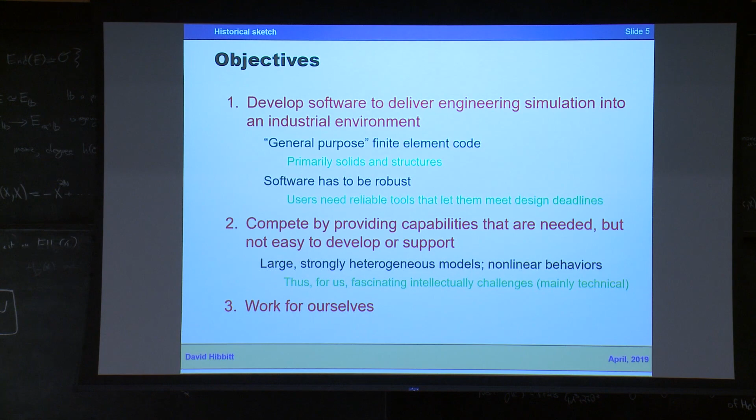They've got to get a design qualified within a certain amount of time, so the software has to be robust. They must have reliable tools. We wanted to compete by providing capabilities that are needed but aren't easy to develop or support, so large heterogeneous models, nonlinear behaviors, and so on.

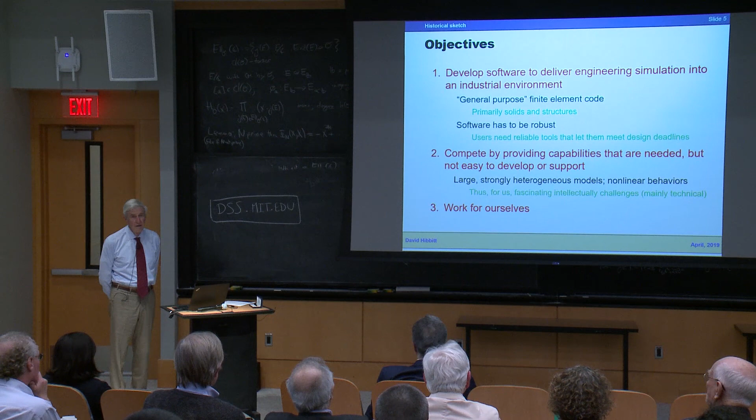For us, the motivation was primarily the intellectual challenge of trying to pull this off and make it work. And thirdly, we wanted to work for ourselves. We wanted to make our own decisions about what we were doing.

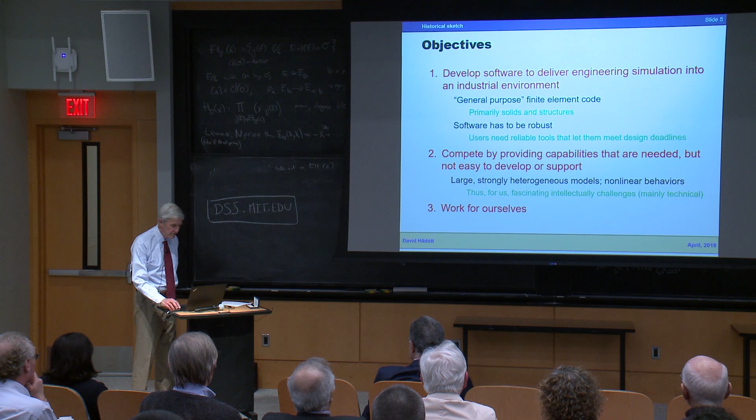Secondly, we wanted to focus on organizations with demanding requirements so we could basically win by delivering value, delivering something they wanted to use in their engineering operations and they were willing to pay for because they couldn't get it many other places. So we didn't want to compete based on price. We wanted to compete based on functionality.

But we also always wanted to keep in mind who our customer really is. It's very nice to be able to say, oh, well, Boeing or Toyota or what have you use our software. But in the end, we always said the customer is not the company. The customer is somebody like us. It's an engineer or an engineering manager who's made the decision to use our software to get his or her job done, and we better not let that person down. So our customer is always the individual who needs to have this software as a tool that he or she can use to get their job done.

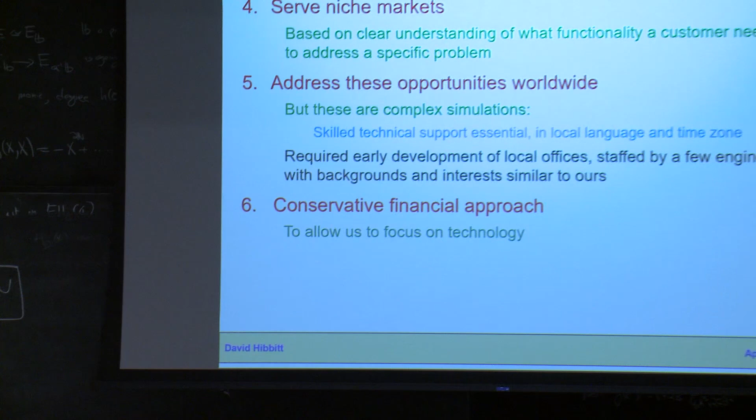We wanted to go into niche markets based on understanding what functionality a customer really needs and then address their problems. And we needed to address the opportunities worldwide, because we're going after niches. You've got to have enough business to have a viable business, and so you've got to go all over the world. But these are complex simulations, so you really have to provide skilled technical support.

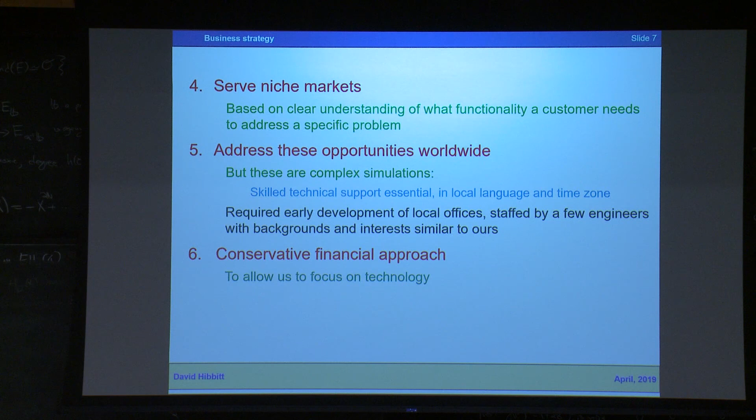That has to be in the local language at the local time zone. If you're in Japan or China and somebody gives you a hotline number in Rhode Island and somebody's speaking English, that isn't going to work very well. So we knew if we were successful, we'd put local offices in place all over the place, staffed by engineers like us who just wanted to help people use this software.

And finally, we wanted to be pretty conservative financially. We just didn't want to worry too much about business issues. We wanted to keep our focus on the technical issues.

The product strategy was the usual engineer's approach: design, then build. Design what you're trying to do, then build it. So our design, in those days, was really three manuals. It began with a user's manual. Bear in mind, these are the days when there was no computer graphics or screens to input stuff and so on, so people put in lines of input and got out lines of output. We wrote a user's manual to put user convenience and ease of use first, to make it easy for people to use the software.

We then designed the software architecture, documented in a systems manual, and we saw the software primarily as a data management system with some engineering routines that were basically accessing that data, working on it, and putting it back into the database. So the core of the software was primarily data management, but there's engineering functionality that talks to those data. We wanted a very general architecture that would give us the broadest anticipated functionality, and we also designed modular code. The idea being that, of course, we wouldn't get it right the first time, but we wanted to make sure that what we got wrong, we could replace a module rather than redoing the whole thing. And of course, we had to have a theory manual.

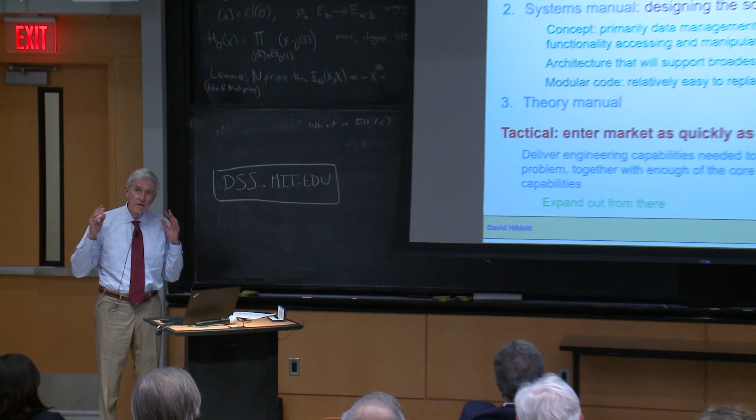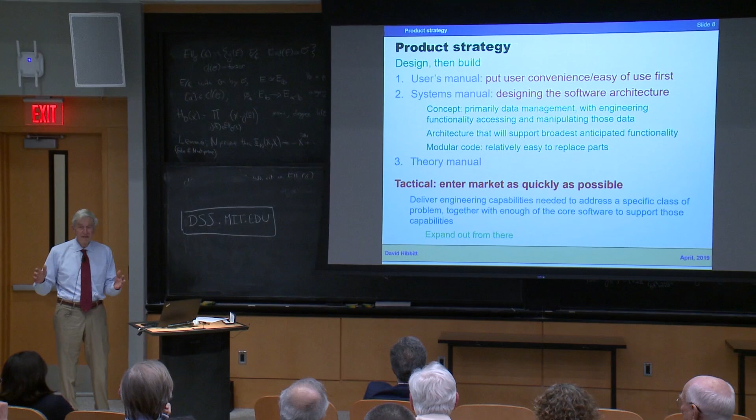somebody will pay us to deliver that functionality, deliver that engineering functionality, and then for this core software, all the backbone of the software, we'll develop just enough of that to support that engineering functionality. So essentially more or less a single-use code, but then work out from there, expand out from there. So that was the concept, and now here's where it happened.

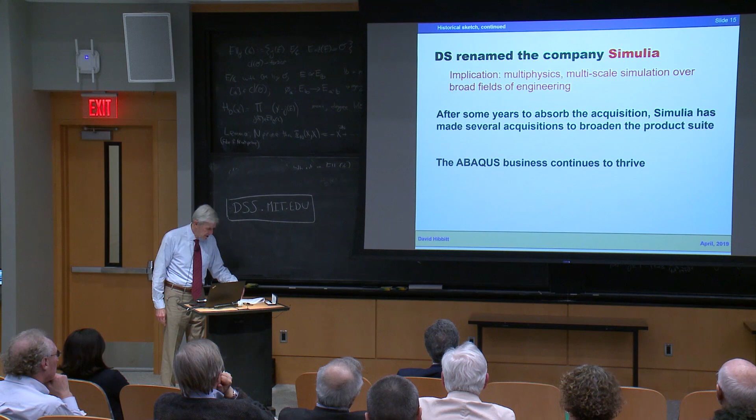And by now, the last check I made, there are about 1,400 employees in the company worldwide. The headquarters is a rather nice building in a sort of a nice office park that's fairly close to Providence. It's in a town called Johnston near Providence. And it's only 10 miles from that farmhouse where we started. So the company hasn't moved very far, but it's certainly come a long way in terms of the number of people it has and just how the technology has developed. So that's the history. Now I'm going to just turn to the technology.

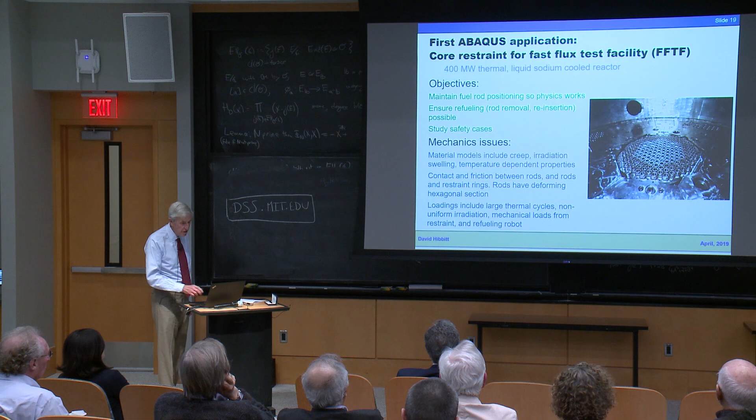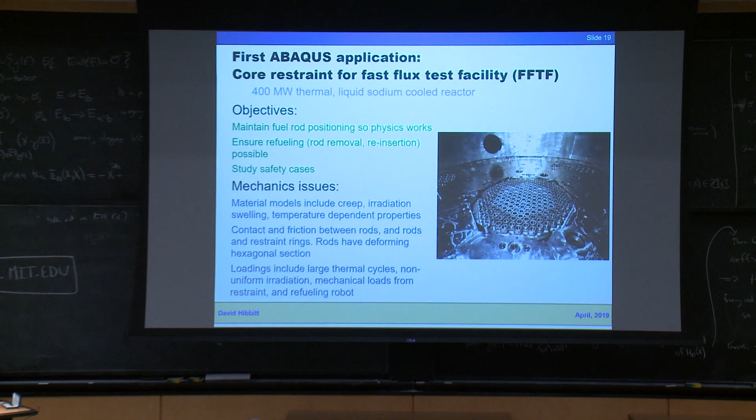And I'm going to start by showing you just some examples of applications. And the first one is here, and this was actually the first application we did with Abaqus. It's core restraint for a fast flux test facility. This is a liquid sodium cooled reactor, very high temperature nuclear reactor. And I can describe the problem very easily. You can see this is the core of the reactor. These circular things are actually hexagonal external section tubes.

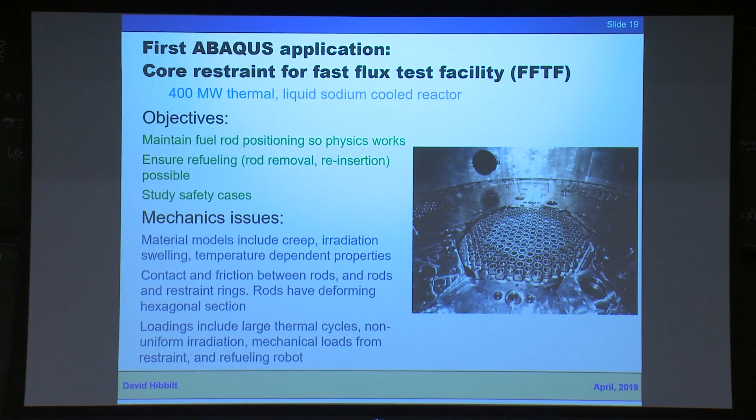They're like a beam. The fuel pellets are inside them, and they're held together inside these restraining rings on the outside. And the mechanical problem is simply to hold those rods together so the physics will work, so you can refuel the reactor when you have to, and so it'll stand up to the safety cases if there's an earthquake or something like that.

Mechanics issues are as shown here. There's creep going on because there's such a high temperature. There's radiation swelling, temperature-dependent properties. There's contact and friction between the rods and the restraining rings. And they have a deforming hex section. And the tolerances are very tight, so we had to use Lagrange multipliers to impose the contact conditions to get the accuracy. And of course, the loadings, as you might expect, are large thermal cycles, non-uniform irradiation, and so on.

So this is the first application, and delivering this actually saved us. I learned about this problem in June of our first year. We delivered the software at the end of September, and it worked in the sense that it did the test case. Didn't do anything else, but it did. We got paid, and we got a follow-on contract, so we were off.

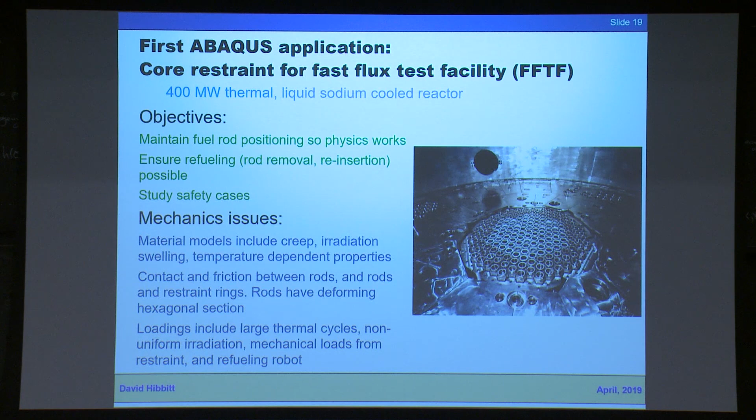I next will show the second Abaqus application, and this is to do with offshore oil fields, and this is just a little picture, if you like, showing offshore oil installations. You have surface equipment on platforms, some of it's floating. You have risers that go from there to the seabed. Remember that the water can be hundreds of feet deep, so these are pretty flexible pipes going down. And on the seabed, you've got wellheads, you've got manifolds, and you've got a bunch of pipes around on the seabed to join these together.

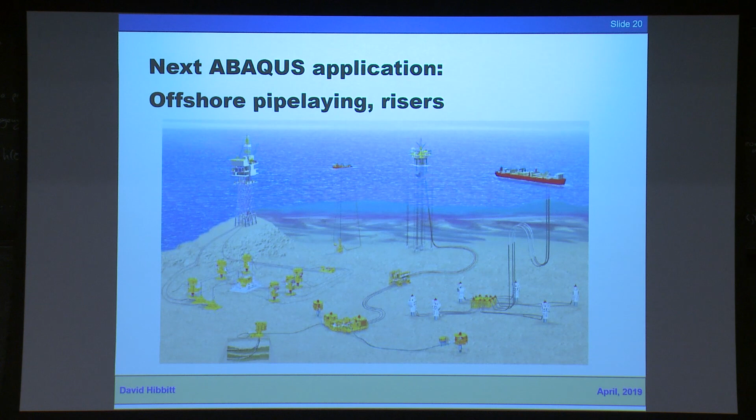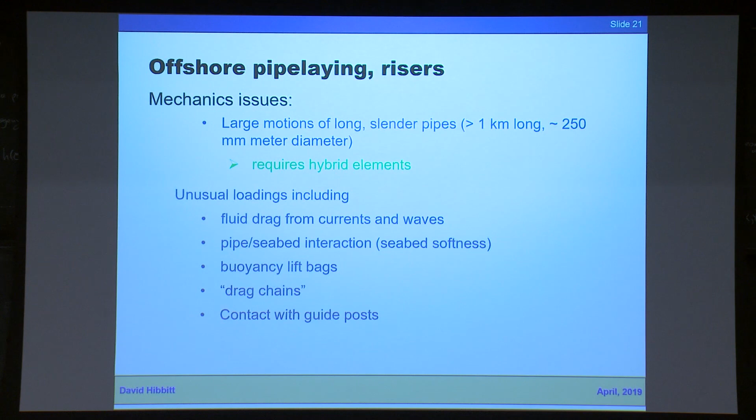And the basic problem is installing those pipes. And that doesn't sound like a really difficult problem, but what makes it difficult are these are very long, slender pipes. They're typically a kilometer or more long. They're only maybe a foot diameter, a hollow section steel pipe. The problem you have is if you get these in the water and you get them on the seabed, you've not got them down where you want them, because you're putting them down from the surface, from a ship. You can only control it through cables from the ship. You get it laid down someplace, but that's not where the wellhead is or the manifold.

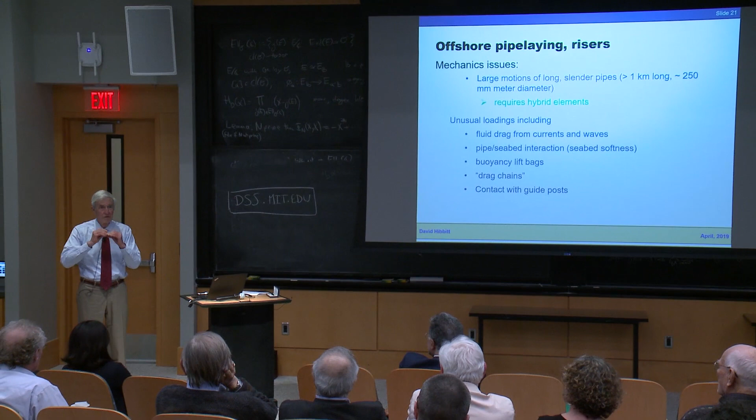So you've got to pull it around on the seabed. And it's like a big drinking straw. If you bend it too far, the cross-section buckles, you no longer have a pipe, you've got some expensive steel on the seabed. So you've got to be able to move it around. So you've got large motions of these long, slender pipes. You can't do it with a stiffness method. You have to use a hybrid method.

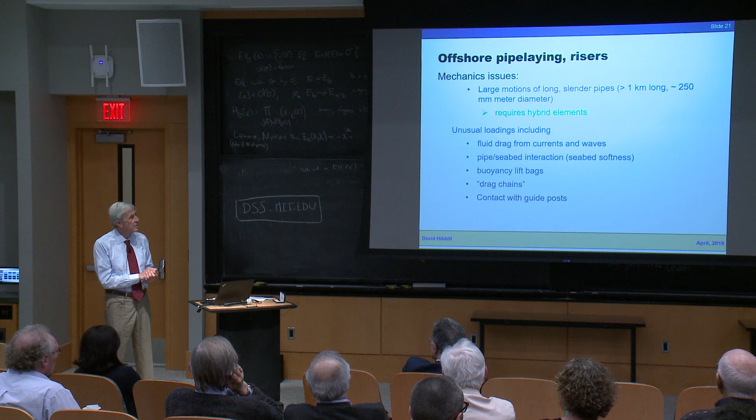And there's some unusual loadings. You're in a fairly dense fluid, and there are currents, so you've got drag on the pipe. The seabed is often soft, so it's moving on the seabed. You've got to model that. They often use the combination of buoyancy, lift bags, and drag chains. They'll get it a couple of meters off the seabed with a lift bag. Underneath is a drag chain. It's obvious what a drag chain is. So you've got to model that as a boundary condition. And they sometimes put guideposts in the seabed to guide it.

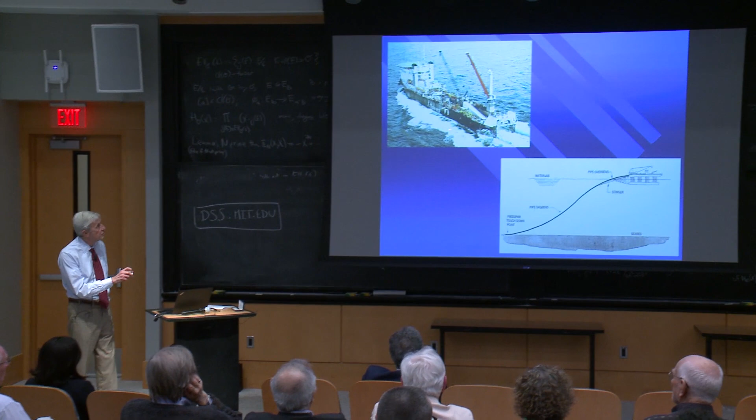I'm just going to show you an example from a customer. I'll flip through these slides pretty quickly that shows a pretty simple case of this. The first thing is actually to get the pipe on the seabed. What you do is you launch it off what's called a stinger on the back of the lay vessel. It goes down onto the seabed. Since this is hundreds of feet, this is a foot in diameter, you can easily lose the pipe doing this. You've got to get enough tension on it to avoid losing the pipe doing that.

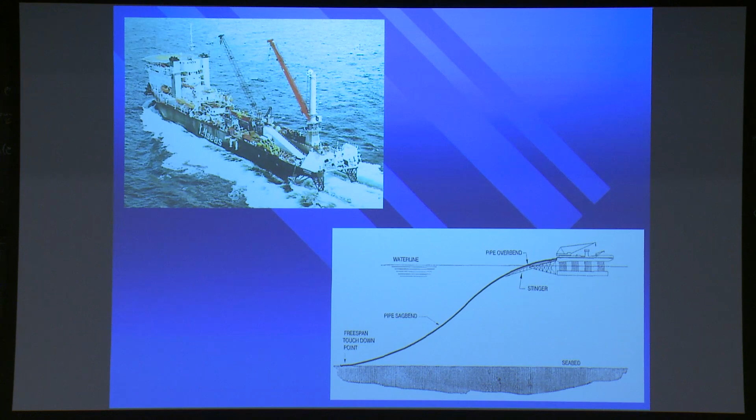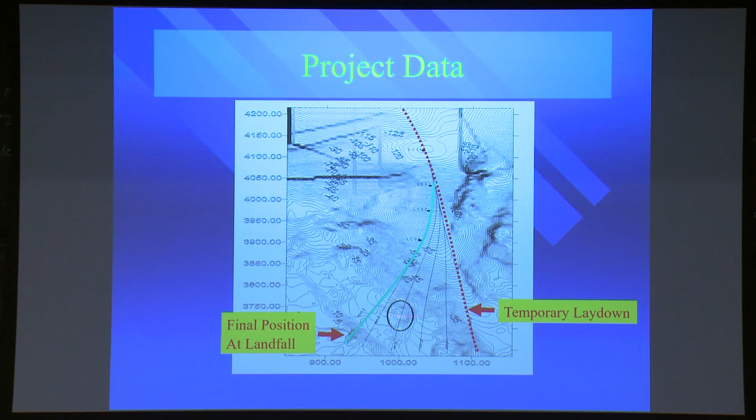If you get it on the seabed, then in this case, you can see the seabed isn't flat. These are the contour lines on the seabed. They laid the pipe down along this red line here. They want to pull it around to get it up. This is actually coming up on shore here. This steep part of the seabed is actually coming up on shore. So that's the problem. Your pipe's been laid here. You want to move it over here. And your tool for doing that is this. It's a vessel from which you lower down some cables, attach them to the pipe, and drive your boat so you can move the pipe around.

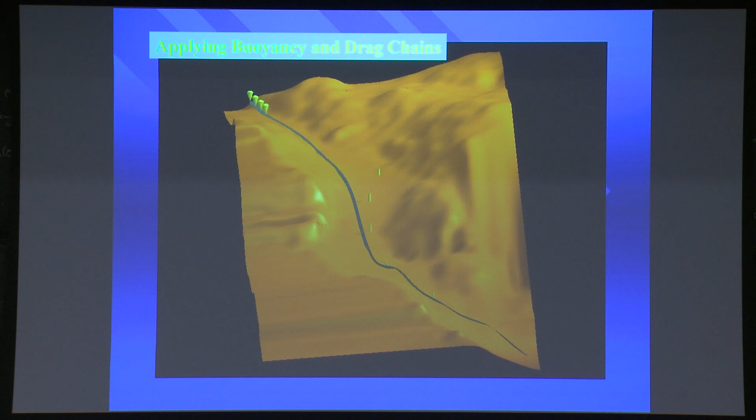And I'm just going to take you through a series of snapshots showing this. This is looking at this particular pipe. So here's where it was originally laid. This is where you want to pull it up on shore. So you're going to move this end around over this mountain and get it up here. And you can see they've got a few guideposts here to guide the pipe around. So I'll just flip through the scene. We put on the buoyancy bags and the drag chains. We apply the cables. We lift it up. Around we go. Lower it down. Take this stuff off. You're finished. So it's as simple as that. Unfortunately, in real life, it isn't at all that simple, and there's a lot goes wrong. But they get them laid, they get them done, and it's a pretty tricky, sort of fun kind of problem.

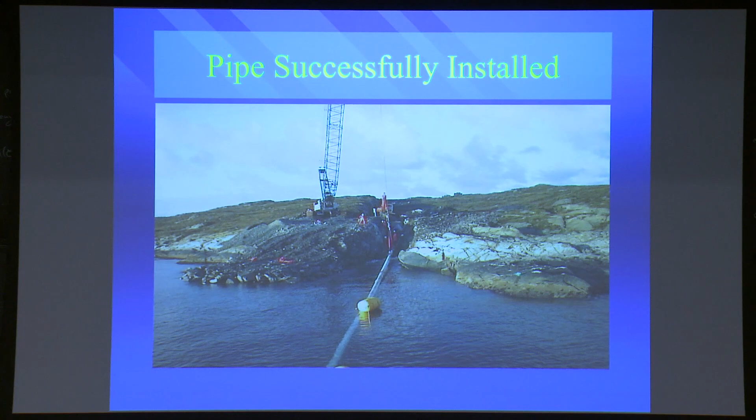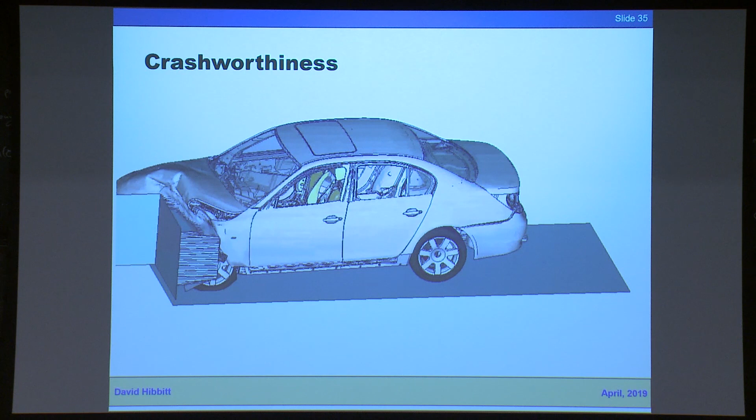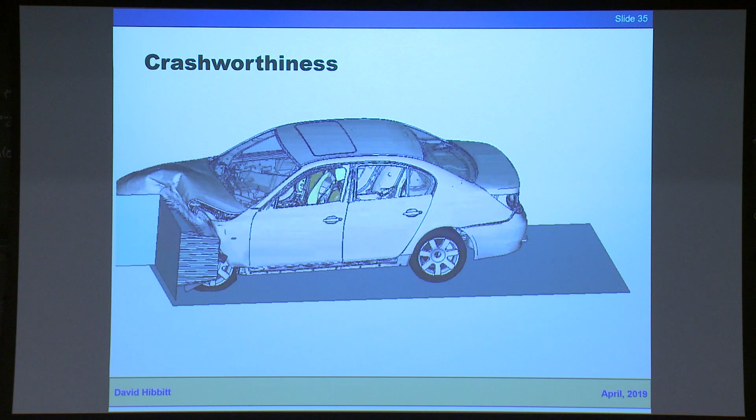You can see we've got metals, we've got plastics, we've got rubber, all undergoing pretty large deformations, buckling, crushing, and so on. We've got a lot of rigid bodies. We've got some glass in here. The engine, the gearbox, and so on are all rigid bodies, and they're having contact with some other rigid bodies. So it's a pretty complex problem, and lots of large-scale computing is needed to do this kind of a simulation. But it's far more valuable than a test when you're doing design. Remember, when you're designing a car for crashworthiness, you don't have any cars to crash because you've not built your tooling yet. So every one of these things you crash, you've hand-built that car to crash it. So very expensive prototype. Much better to do simulation, particularly because you can also see much more about what's going on.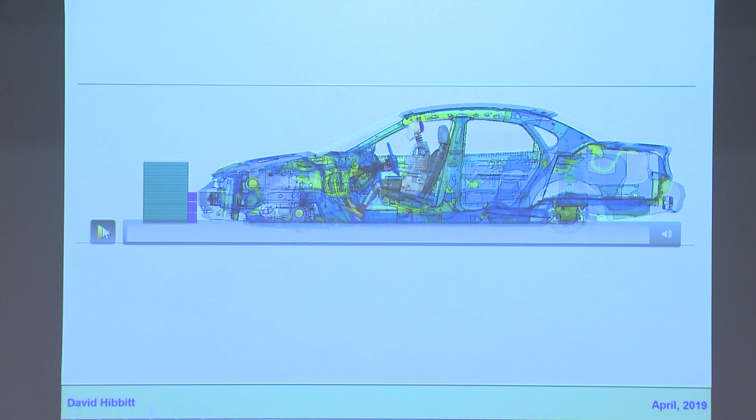Again, I'm now looking underneath one of these cars, and you can see we can take a look at what's really going on from the underneath, or with good visualization tools, what we've done here is we've made the side of the car transparent so we can look in and see what's going on while the car is crashing from the side. And you'll notice the design technique here is the powertrain goes down under the floor pan so it doesn't run into your knees and crush your thighs.

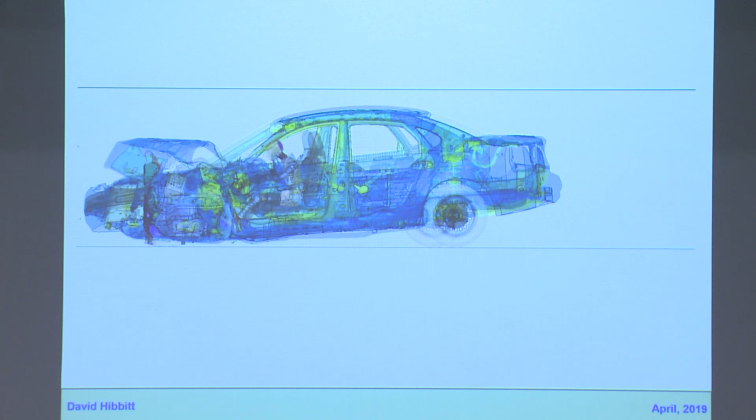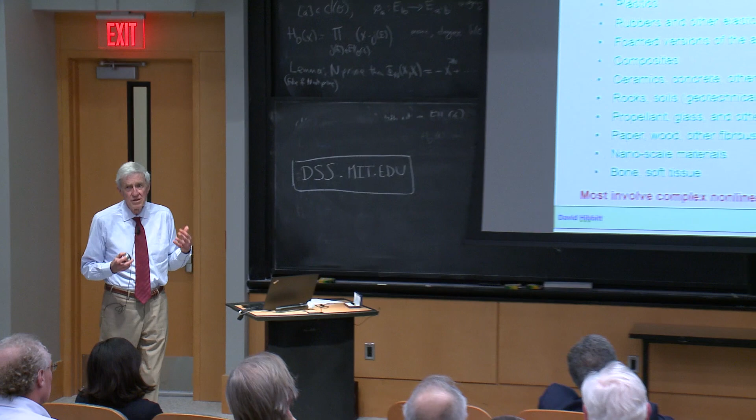Let me talk about some ingredients in the technology. And first of all, materials. Constitutive modeling is a huge part of it. I've listed a bunch of materials that we worked on from time to time. I'm not going to take you through that list, but it's a lot of constitutive modeling that you have to have. Many materials with complex responses to high loads. The models are often heterogeneous, lots of different materials.

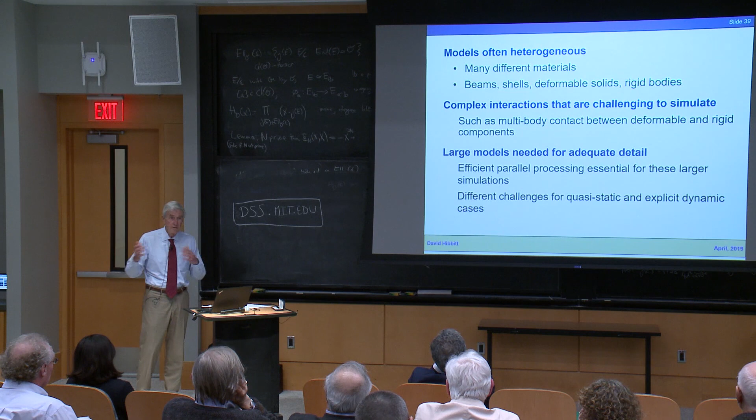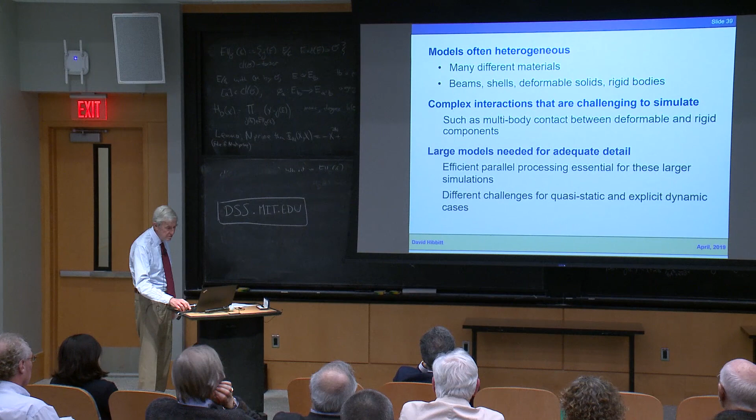Beams, shells, deformable or rigid bodies, so if you're thinking of it mathematically, the eigenspectrum of the stiffness matrix is pretty broad. There are complex interactions that are very challenging to simulate, multi-body contact, and there are large models. So those models I showed you, 15 million variables is not a small model, at least for me. And so you've got to make effective use of parallel processing, but that's quite hard when you've got these heterogeneous models. Keeping all the cores of a parallel processing machine busy with this kind of modeling isn't easy. And the challenges are very different for quasi-static and dynamic cases, such as I showed with the car crash.

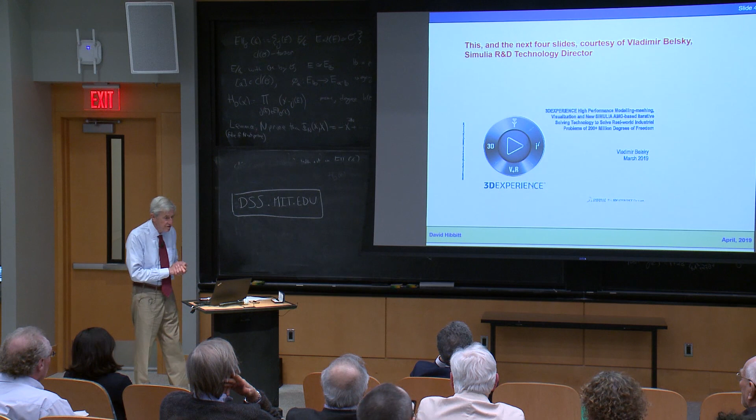I borrowed some slides from a colleague who happens to be sitting here, Vladimir Belsky. He works on solver technology. He directs that technology in Simulia now, and he's lent me a few of his slides. So if you want questions about these slides, Vladimir can talk to you after I shut up. But this is an AMG-based iterative solver, and I'm just going to show you a couple of cases.

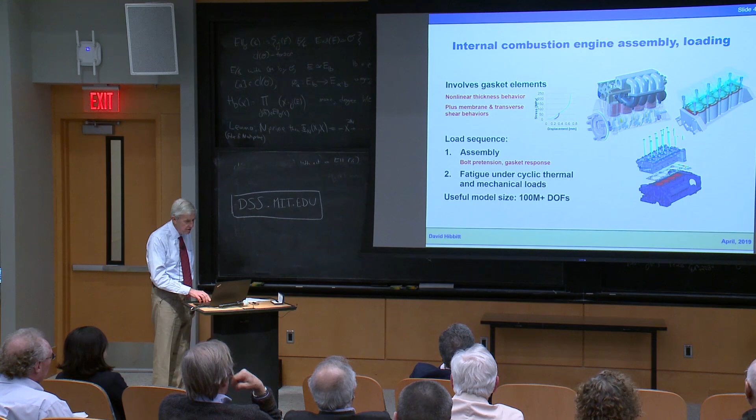This is internal combustion engines, and in this case, we're bolting the head of the engine onto the cylinder block of the engine. So the load sequence is to assemble. There's a gasket in here, and the gasket has a nonlinear behavior. And the whole idea is to make sure you can get the fatigue life you need out of this engine. So you've got to assemble the engine by tightening the bolts, squash the gasket, take it up to temperature, do the fatigue cycles, and see what goes on.

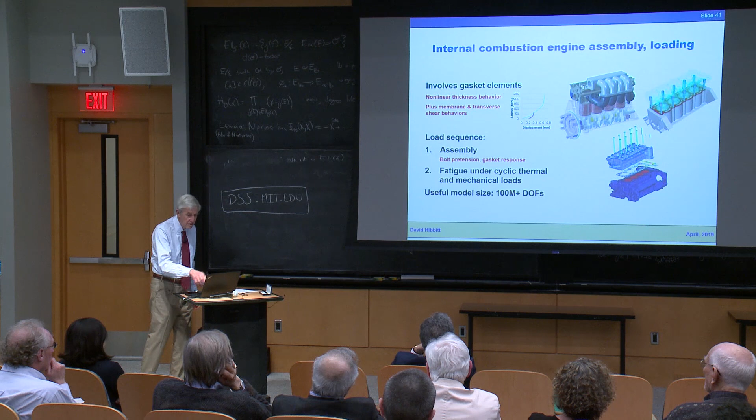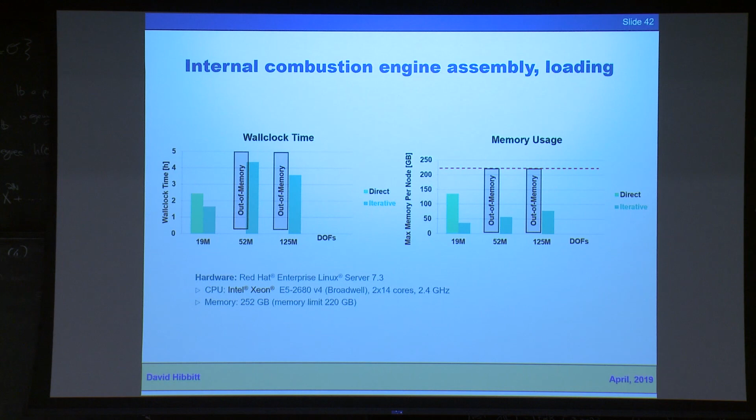And there's a lot of detail in these models, and I'm just showing you some results that Vladimir has with his solver. And you can see that we're doing this with about 125 million degrees of freedom. And I've got wall clock time over here. You can see they'll do that calculation in a few hours on this kind of a computer. So pretty effective use.

Another example here is a turbine blade. Again, this is heat transfer analysis. You may know that with these blades, typically the airflow over the blades is at a temperature that's above the melting temperature of the metal. So you deal with that by having lots of holes in the blade and blowing out cooling air. So you've got a film of cold air between the hot fluid and the metal. So what you're interested in doing basically is heat transfer analysis and then stress analysis just to get fatigue life out of these. And in this case, it's at a high enough temperature that there's creep going on.

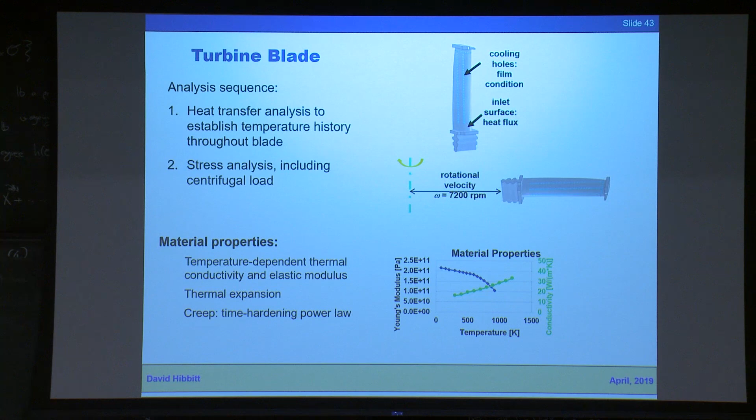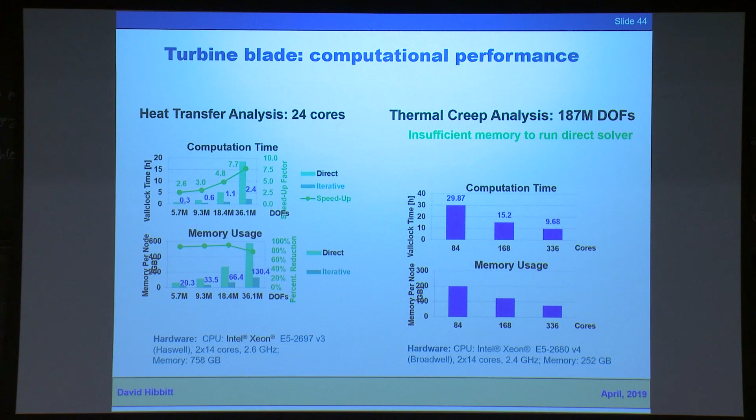Again, what I'm looking at here is the computational performance, and you can see here the heat transfer analysis. The thermal creep analysis is almost 200 million degrees of freedom. You couldn't do this with a direct solver. What I think is impressive is the scaling he's getting on the number of cores on the machine to get this down to a good compute time. So that's the kind of computation you have to do for that class of calculation. And the solver technology you need to do that is pretty sophisticated.

But this is an issue, of course, because now we're putting out vast volumes of data from the analysis code, but in the end, the user, the customer, has to make an engineering decision. Is the design acceptable? And if not, how am I going to improve it? So you've got to reduce all of those data to that engineering decision.

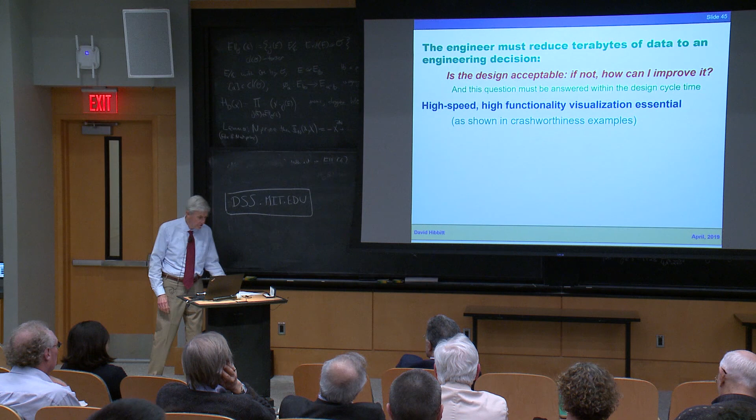So high speed, high functionality visualization is absolutely essential, and bear in mind this is spread over a parallel processing machine. So you've got to be able to do that kind of stuff as well. But how do we know the simulation really is close to reality?

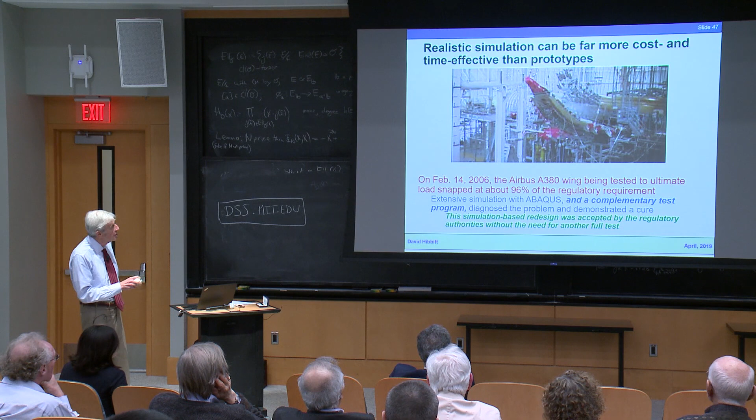Well, first of all, I want to make the point that it can be far more cost and time effective than building prototypes. What I'm showing you here is an ultimate load wing test on an airplane. This is an Airbus A380, the double-decker airplane. All commercial aircraft have to do an ultimate load wing test. What they're doing here is they built the airplane, they bend up the wing and load it until it breaks.

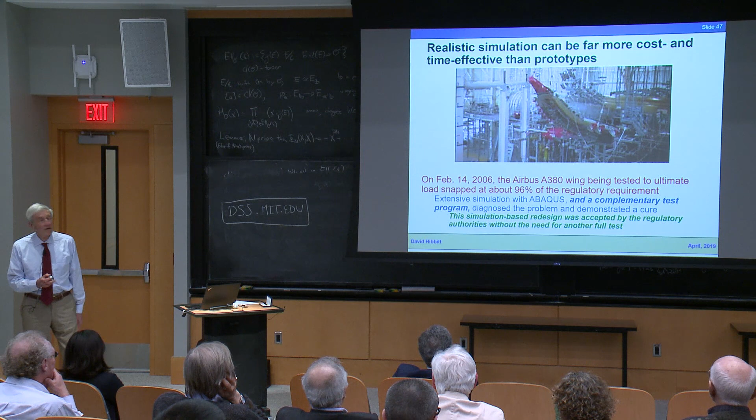Now, I think if you were riding this airplane, you might get a little nervous if the wing were bent up this far. But that's the test they do. And there's a regulatory requirement. This plane failed. They tested it. It got to 96% of the requirement. It didn't pass its test. It was fairly easy to diagnose the problem.

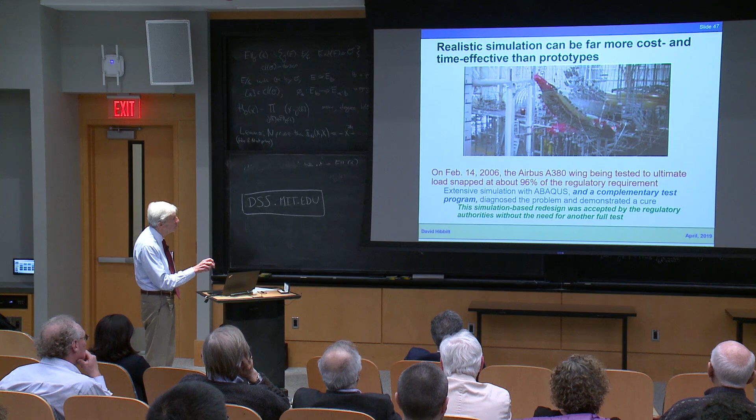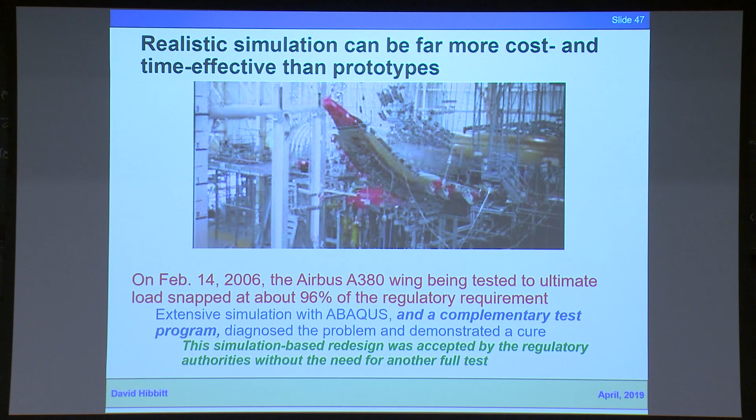What happens is these wings are complicated structures. Down in this part of the wing, there's a lot of interior structure with walls in it, and those walls are helping. And they didn't expect those walls to buckle, but they did. So they just had a buckling problem. They hadn't modeled that. What they did is did lots of simulation with Abaqus. They redesigned this part of the wing.

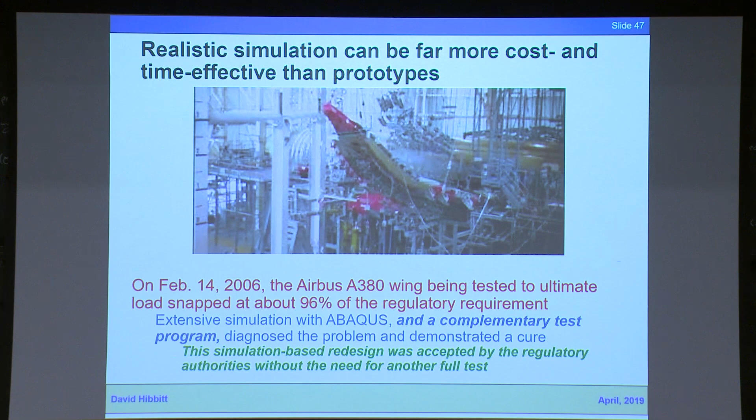They did a test program on that part of the wing, showed Abaqus predicted the failure in the original wing, showed the redesigned wing passed the test. So as far as I know, this is the only commercial aircraft flying that never passed its wing test. But I'd be quite happy to ride in that airplane. That wouldn't worry me.

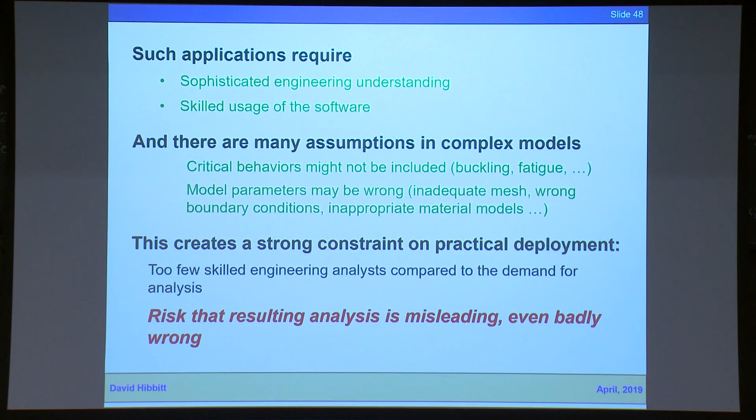But there is an issue here because this requires pretty sophisticated engineering understanding, skilled usage of the software, and there are lots of assumptions in these models. You just might not have got it right. So there's a huge constraint on practical deployment. There are just simply too few skilled engineering analysts who understand what they're trying to do, understand the software that they're using, and the modeling they're using to make sure that they're getting it right. And so there's a real risk that the analysis is wrong and could be even badly wrong.

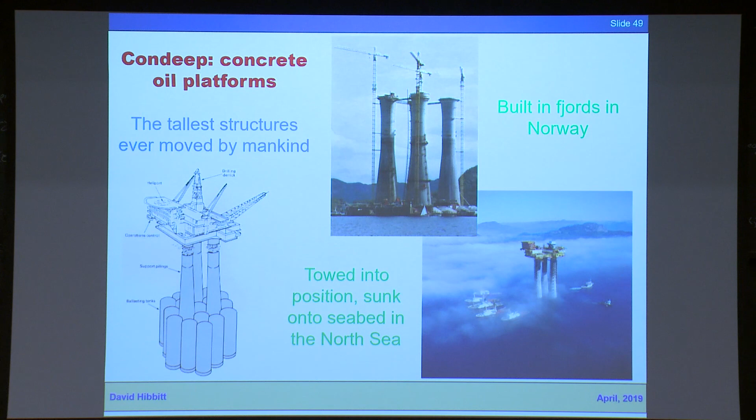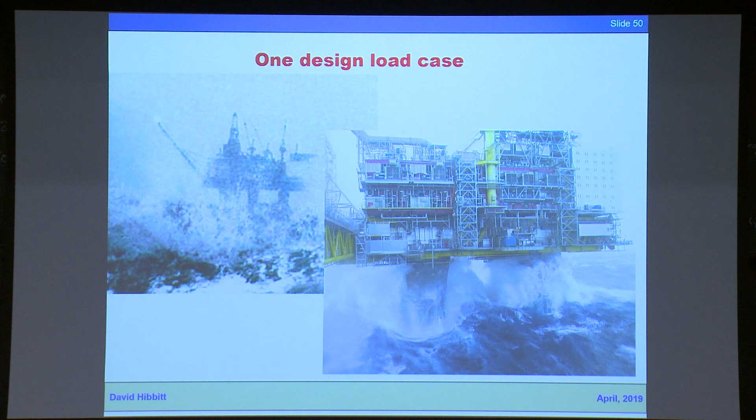August 1991, the Sleipner A Condeep cracked and sank during a test. It was in the fjord. They'd sunk it down, and they pumped one of those tall pieces dry, and the guys working up top heard this big bang. They heard water pouring in. They got off the platform. A short while later, there was a seismic event locally, and there was a bunch of concrete on the seabed.

The loss was about $700 million in 1991 dollars, 1.3 billion today. And it was bad finite element mesh. In these joints where these cylinders join onto each other, you can see a test specimen here. They just didn't have enough rebar in there. They didn't have enough reinforcement. And the finite element mesh was too crude to pick that up. So there's a huge loss just because the people weren't doing the simulation accurately enough.

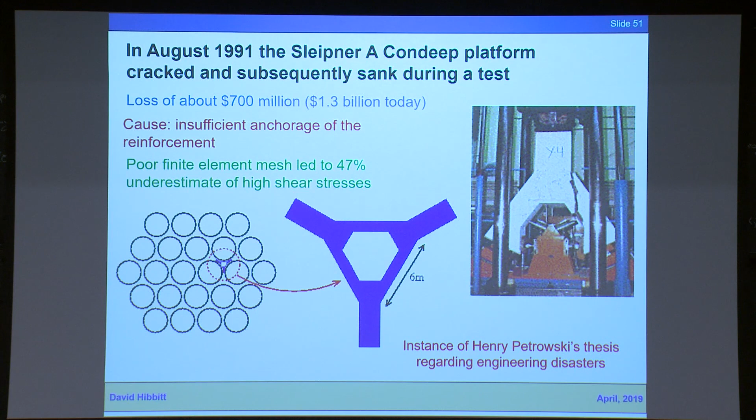How do we deal with that?

One approach we used is application-specific customization. Many engineers are doing the same problem over and over again. If you're doing turbine blades on jet engines, they always have about the same shape and concept. So the idea is to create a custom system. Forget about using a general-purpose code like Abaqus. Put a frame around it for a particular problem, and make sure your experts create a custom system with a user interface the user can understand. You limit the parameter range, pre-qualified meshing, and all the right materials data are built in, so you've got a high degree of confidence that your designs are going to work.

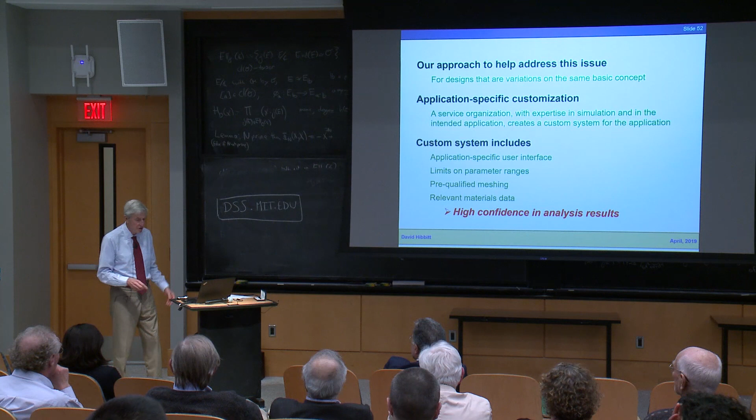Let me show you a couple of examples. This one is at Procter & Gamble—the kind of stuff you see in the supermarket. There's a constant battle between designers and engineers for these things. The designer wants it to look nice so you'll pick it up; the engineer wants to make sure it works. Making sure it works generally means load cases like filling, squeezing, and top loading.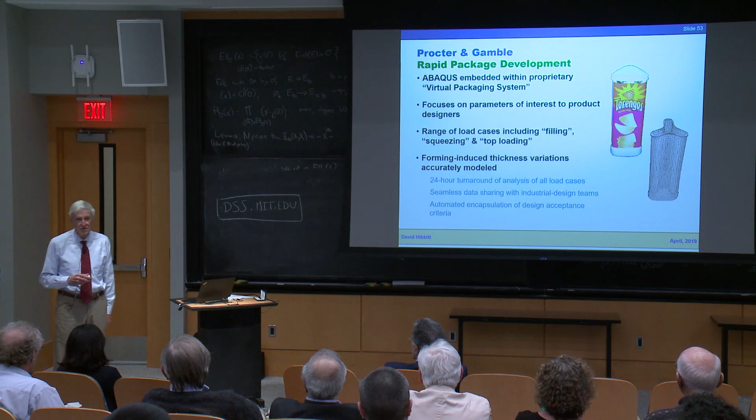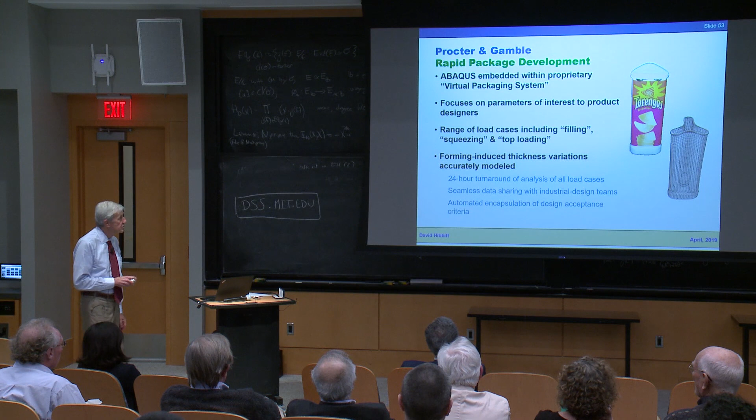Filling: these things are made in huge volumes, moving through the factory faster than the eye can see, so they've got to stand up to the loads while being filled. Squeezing is how the customer responds to them. Top loading happens because they stack them in the warehouse about 40 feet high—if the ones at the bottom buckle, you've got a lot of stuff on the warehouse floor and not much product. So these are formed with thickness variations included. The engineers at P&G can take a new design, put it through this system, and in 24 hours go back to the designer and say, well, that one isn't working—you've got to fatten it up here, so it actually works as a product.

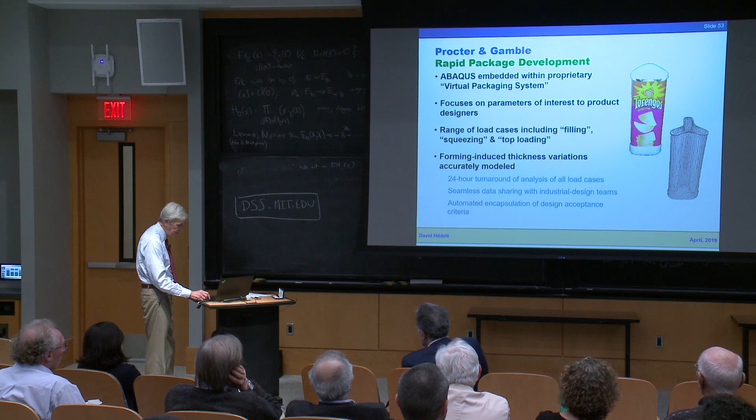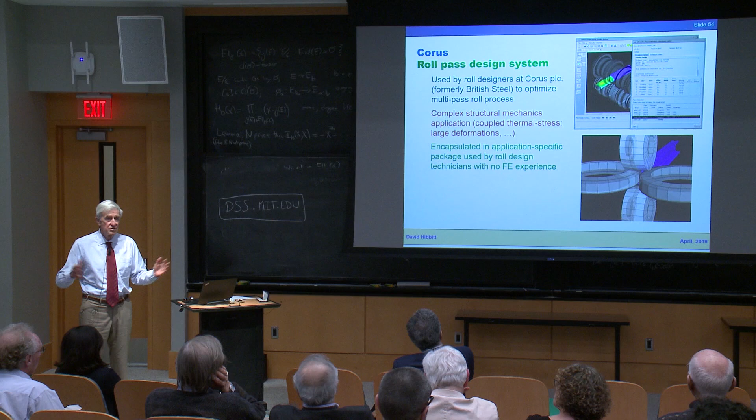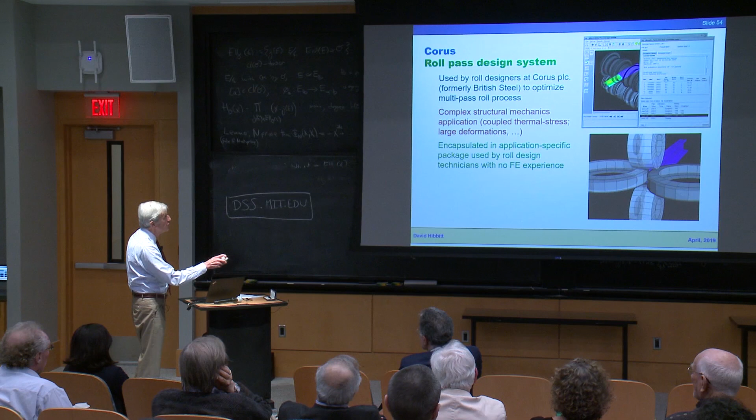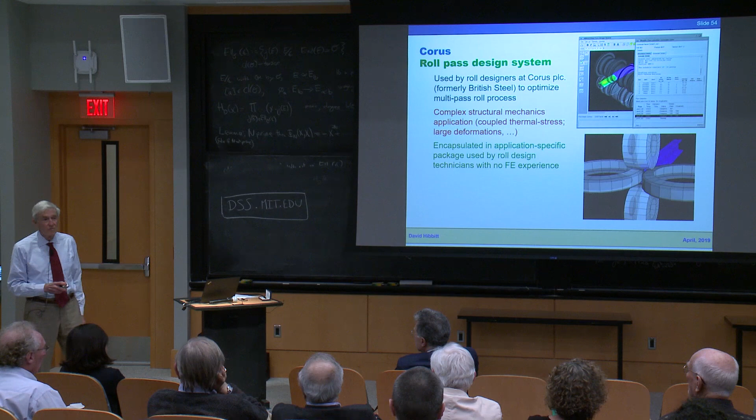Here's another one, a pretty sophisticated example: heavy section steel rolling. The steel comes out of the continuous casting oven as a billet of white hot steel, about this wide and that deep. They take it into the rolling mill, run it through rollers in several passes, turning it from that rectangular cross-section into an I-beam, sheet piling, or whatever you want. The job of the roll mill technician is to design these rollers so that with the smallest number of passes, you end up with the product you want. So it's a very complex problem.

It's a fully coupled thermal stress analysis with very large deformations, radiation boundary conditions, contact problems, and so on. All this is embedded in a user interface like this one, used by roll mill technicians—the guys who sit in the mill and have to figure out how to machine these rolls to get the product made. So they run a bunch of simulations. Inside this is Abaqus, but what they see is just this interface. They get their process designed, and that's in daily use in this steel mill.

Okay, that's what I wanted to say about the technology. Next, I'm going to talk about the market.

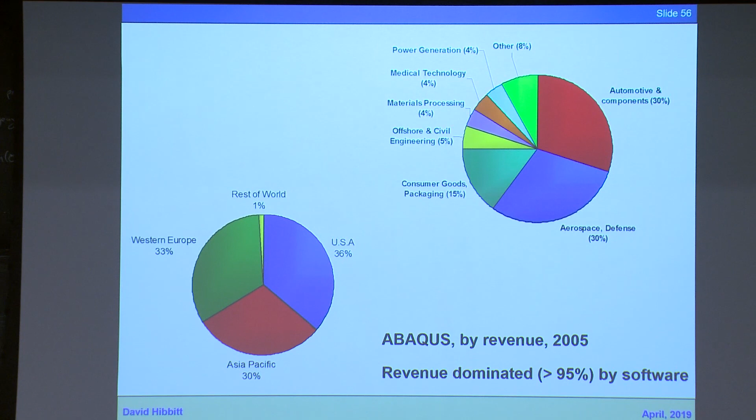This is just a snapshot from 2005, when Dassault acquired the business. First, we wanted to get our money from selling software, and that worked—95% of our revenue came from software leases or sales, so we had a very stable revenue stream. That's enormously valuable because a typical development project would be a 5 to 7 year project, and you need stable revenue to sustain that. The geography wouldn't surprise you: roughly a third in the US, a third in Asia Pacific, a third in Western Europe. Asia Pacific is basically China, India, Japan, and Korea.

Looking at industry segments, aerospace and defense and automotive wouldn't surprise you. Consumer goods and packaging was our third biggest industry segment, and I think that surprises a lot of people, but the reason is simple: high volume. All these consumer products are made in enormous volume, so getting the engineering right on your product or manufacturing process can save you a lot of money or cost you a lot of money.

I'll give an example most people wouldn't associate with engineering calculations: disposable diapers. There are about 20 billion disposable diapers used in the US every year, so if you save or cost a fraction of a cent on a diaper, that's a lot of money. So getting the diapers designed right is a good idea. It happens that we delivered functionality for fluid flow through a deforming porous medium, primarily for geotechnical applications.

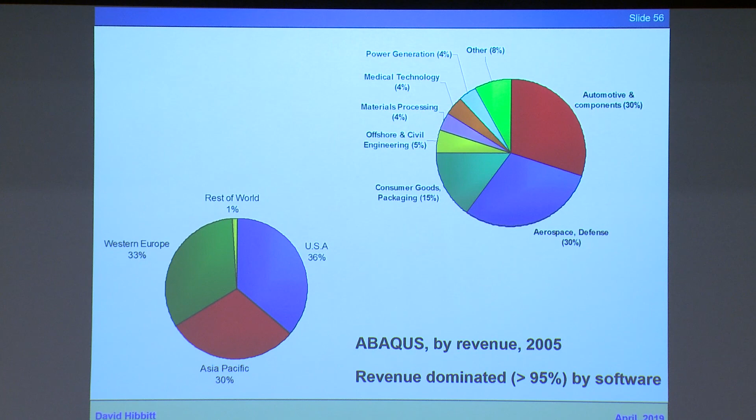People who are putting subways under cities have got to put a tunnel through saturated or partially saturated soil, so we had that functionality in ABAQUS. And if you think about a diaper, it's fluid flow through a deforming porous medium.

The engineering problem is pretty simple. You've got fluid flowing into the diaper, and you've got hydrophilic particles designed up there in the diaper. The idea is to divert the flow up there and hold it long enough for these particles to do their chemistry, suck up the fluid, and hold it, without spillage. There's also large deformation because while you're doing that, the baby's kicking his or her legs around, so the medium is moving quite a bit.

So that's what they do, and there's a lot of ABAQUS calculations done to design a disposable diaper. That tells you why that's our third biggest segment.

I haven't talked about the academic market because we really didn't think of it as a business. We had a lot of friends who were researchers, and they wanted to use ABAQUS to try out constitutive models. So we designed a general user interface called a user material interface, where you could have as many state variables and material parameters as you wanted, and plug in your constitutive model to the code, then use it with all the other functionality in ABAQUS.

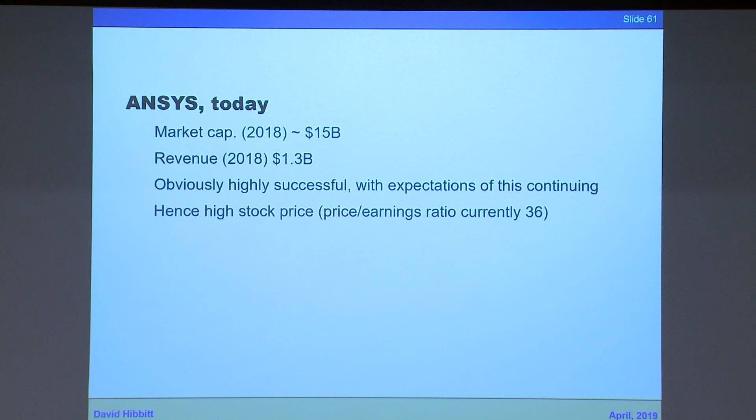I'll show you a very different story. In 1991, one of the leading academic researchers, a professor at Stanford, started a company called Centric Engineering Systems. It was richly funded by one of the best venture capital firms in Silicon Valley. They raised about $16.5 million in 6 rounds. They took 5 years before they did anything.

We were very frightened because these were really superb guys. They really knew all the technology. Many of their papers helped us in terms of stuff we put into ABAQUS. And we just couldn't get any information until they announced their product, Spectrum.

They'd hired a sales force, their marketing people had done a good job of identifying our customers and our competitors' customers. And the sales story is very simple: look, we've now got the real software. You've had this stuff like ABAQUS, you can replace that with our code and all these other things you're using for this kind of engineering simulation. You'll save license fees, training costs, and so on.

Of course, the customers do exactly what you'd expect them to do. They say, well, okay, that's very interesting. Here's a couple of examples of what I do with ABAQUS. Here's some examples of what I do with something else. Show me that Spectrum can do these well enough, and we'll switch.

Well, every one of these applications have some tricky details that haven't been implemented. You're trying to lay pipes on the seabed, you need to model drag chains, you need to model fluid drag on the pipe and so on. They didn't have that. You're trying to do engine assembly, you need gaskets. They don't have a model for gaskets. They don't know how to do a boundary condition for bolt loading, and so on. Always there's a list of deals.

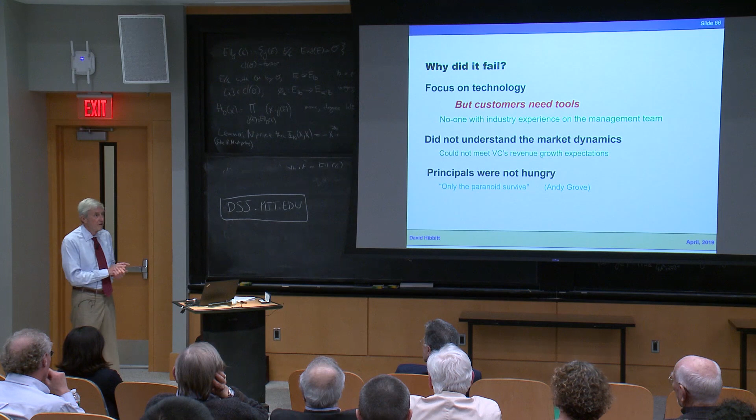And maybe I'm being rude here, but I'll say the principals weren't hungry. All of these are academics, the management team and so on. They didn't give up their day jobs. They kept their tenured positions in their universities. And as Andy Grove famously said, only the paranoid survive.

Okay, I'm now going to talk about us and what we got wrong and what we got right. First of all, what did we get wrong? Well, tons of stuff. We made lots of mistakes, and we knew we would, and we just worked hard at learning on the job. So in most cases, we could get over the problem without losing a ton of money, but not always. There were two that really were pretty catastrophic for us.

In each case, we wanted to add a new software component to ABAQUS, a big piece of software. And we didn't want to buy somebody else's package and then make it fit in ABAQUS. We wanted to be consistent with our design of the software suite. So both times, we started with a clean sheet of paper. We hired the best people we could attract, told them what the specification was, gave them the budget and authority to do it, and said we want the best functionality here to go into the ABAQUS software suite.

In both cases, they were much too costly and very delayed, so it was a tremendous struggle, but we had to make it happen. And in both cases, I'm afraid, we replaced the managers more than once, and these were really good people, so they, I'm afraid, lost their jobs over these. Eventually, we made them succeed, and they became very big contributors to our business. So we were able to pull it off, but I can assure you it was a big battle to get that done.

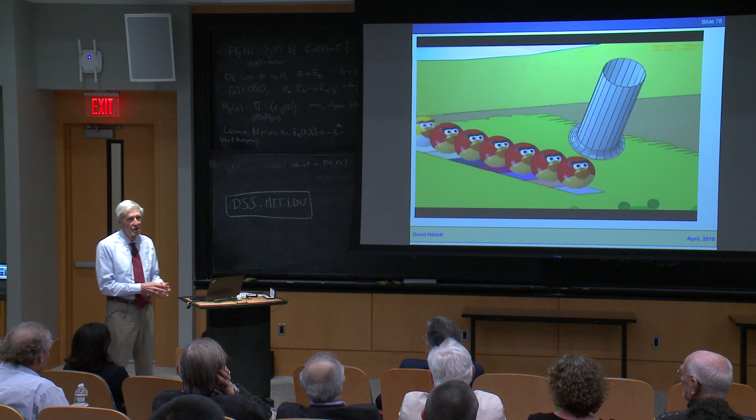And they're in a fluid. The fluid has the properties of air at normal atmospheric temperature and pressure. And you'll see there's a rigid tube above them. What we're going to do is start the conveyor belt, pull a vacuum on the top end of that tube, and see what happens. So let's see what we can do.

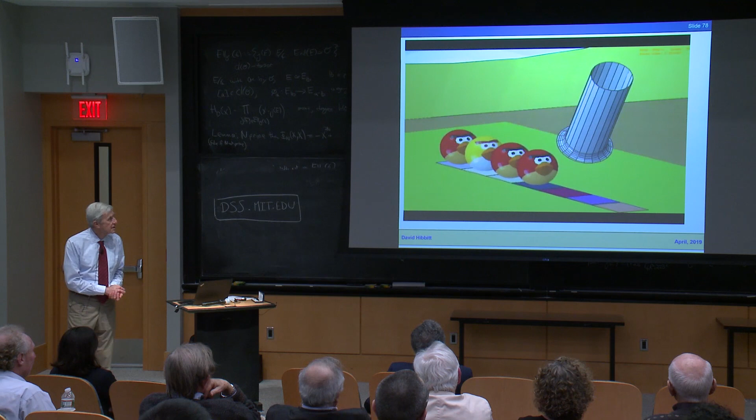So you see there's some contact problems being solved here. There's friction in the contact. There's rigid bodies, deformable bodies hitting each other. All right, that's it.